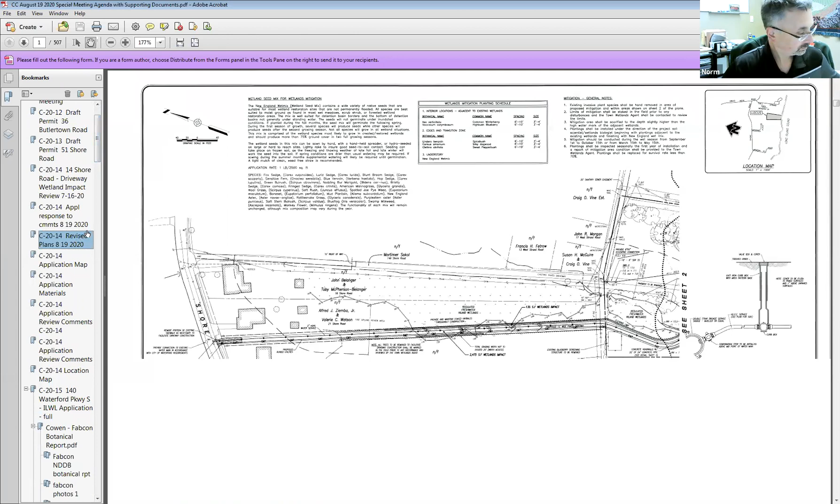Okay, these were the plans that were submitted in response to comments from your staff as well as the fire marshal, and Norm's going to walk us through the changes that were made and the areas of impact. Thanks, Norm, go ahead. All right, thank you.

In response to staff comments, Maureen had a total of 10 comments that she wanted us to address, and I think it's probably best that I just go through them sequentially as they were presented to us.

So number one, the wetland evaluation report indicates there may be a potential 8,000 square foot impact associated with upgrading the existing paved drive. This paved driveway is currently the driveway that Mr. Mortimer has an easement over to access his property. As you know, the proposal before you is to construct a dedicated drive within a 20-foot strip of land that he owns that goes to his property.

One of the questions regarding the existing driveway was about upgrading it because it is rather narrow in some spots. It was originally constructed through wetlands, and there are significant wetlands on either side of it. However, one of the issues Maureen brought up is whether Mr. Mortimer actually had permission to upgrade that driveway, which he didn't. Secondly, there was also a question of whether it was an access easement, but there really is no language in that easement saying he could run utilities up there.

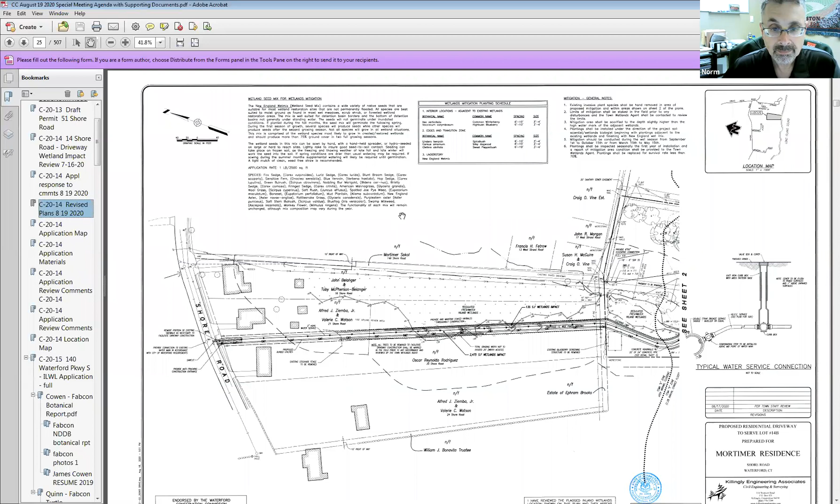Number two, the site plan needs to identify the limits of vegetation clearing. If you go to sheet 2, Maureen - we've actually shown it along the existing driveway, but in this area, along where there's going to be a crossing of an intermittent little water course, it's actually kind of a drainage that comes down through that point. We've shown the limits of clearing with a heavy sort of tree line there.

I don't know if you can see my marker on the screen here, but right next to that note that says 275 square feet of wetlands impact is where the limits of clearing are going to be. That limit is anywhere from 25 to 40 feet from the delineated wetlands in that area. Also in that area, which I'll get to after, we are proposing some mitigation for the impacts we're proposing on this project.

Number three, erosion and sedimentation control measures are required for construction of the southern part of the proposed driveway and the culvert installation. We've noted for the culvert installation - for clarity it was just easier to address it as a note. I've shown staked hay bales on both sides of the driveway adjacent to the wetlands, and I also have a note on the plan to provide crushed stone check dams upstream and downstream of the proposed crossing area during construction to prevent any silt or sediment from transporting down through that area.

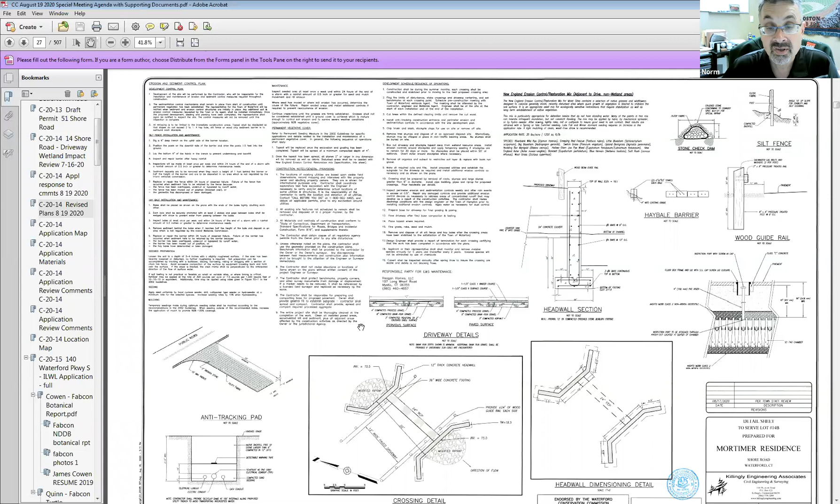At this particular area, we are limiting the disturbance to only 275 square feet. We estimate that it would have been somewhere in the realm of 800 to 900 square feet without the headwalls. So in our opinion, we think it's just a much better solution.

Additional detail is required for the 3,000-foot wetland mitigation area - that's the area Maureen is showing you. If you go back to sheet number 1, this was put on the plans under the recommendations of Ian Cole, the wetlands biologist who couldn't be here this evening.

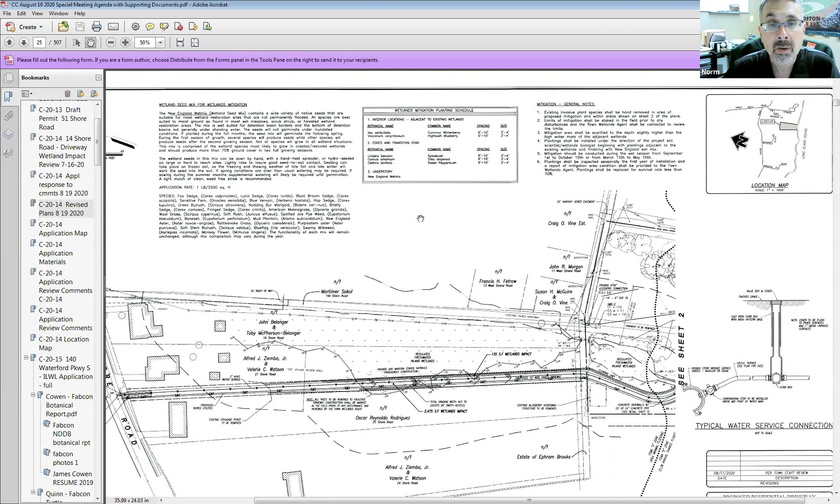For the peripheral areas we're proposing a New England wetland seed mix, and then the mitigation planting schedule for interior locations adjacent to the existing wetlands calls for common winterberry and high bush blueberry. Edges away from there in the transition zone will have spicebush, silky dogwood, and sweet pepper bush, with the understory between these using the New England wet mix. I also have some general notes for the mitigation describing how this would be accomplished.

We are also going to be doing some invasive species mitigation along the edge of the channel near the crossing, on both sides - that's where Maureen is pointing out. There are some things like autumn olive there, a couple of other invasive species, bittersweet, things that are really kind of taking over, so the notes specify that.

That particular activity is going to be by hand methods. We do not recommend or call for the use of machines to take that stuff out of there. I think note number 7 really talks to that same point about the adaptive invasive species management plan - I believe I included it with my last response.

That was comment number 7 by Maureen in her review. Number 8, the wetland flag numbers on the site do not correspond with the plans.

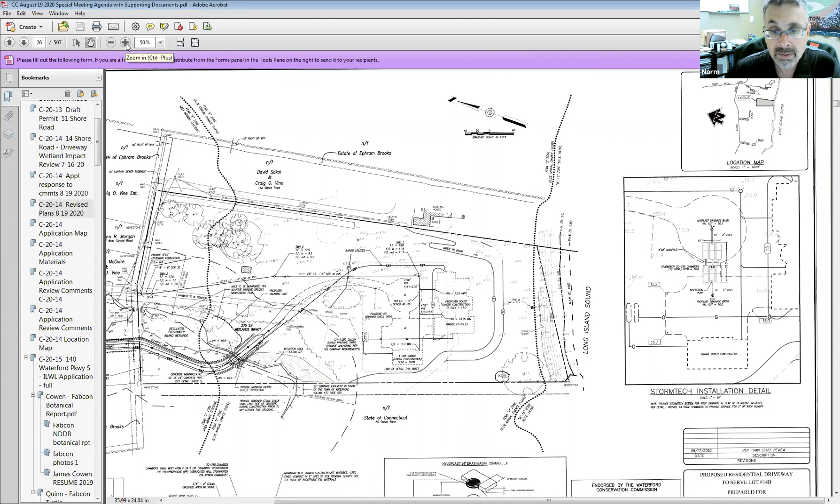What we did in the areas of the crossing - the original wetlands were delineated by Joseph Thoreau, and by the time we got involved here, and I think by the time Maureen went out there, the flags were gone. Even though they had been survey located, they weren't visible in the field. So we had Ian Cole go out there and redelineate in the areas where the crossings would be.

Those don't correspond to the original wetland flags, but Ian was actually able to find some knots from the original flags that he rehung, and he agreed substantially with the previous delineation. In fact, I believe he said that when he went out there, he thought it was pretty much spot on with what he would have delineated.

So what you're seeing on the plans in the areas of the crossings are the flags that we actually survey located. And for the wetland flags away from the crossings, those were wetland flags that we took from the previous survey.

The plan should be stamped and signed by the engineer. I did stamp that plan - I believe these particular plans show that. I had Ian's signature on it too, that you can't see very clearly, but he also did sign the plan as well.

And then finally, I think there were a couple of leftover notes from the basically canned narrative that we use to start the projects off, and I think there were a couple of spots that mentioned another municipality. We've addressed that and made sure that all references within that narrative refer to Waterford.

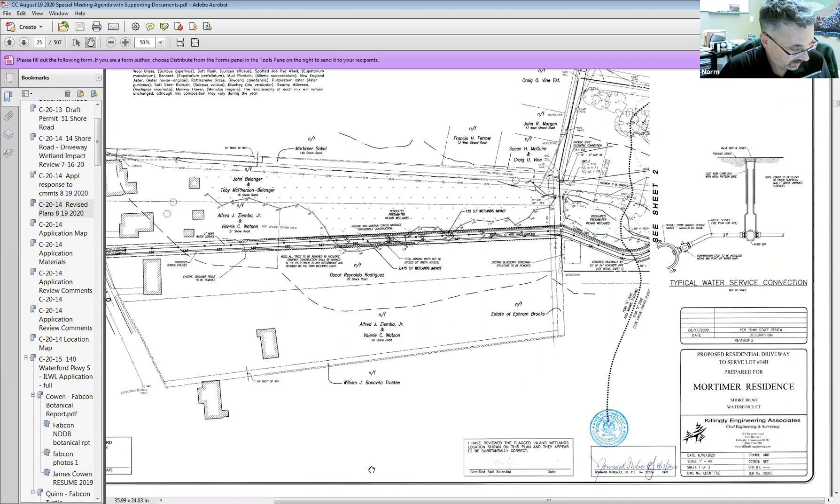There was a comment by the fire marshal regarding the existing driveway not being blocked by bollards. That particular proposal is going away because we were talking about abandoning that existing driveway and making it a pedestrian path, with bollards to alleviate traffic. That proposal has been eliminated, and the fire marshal didn't want the bollards there anyway. He said it would be a good secondary access should there be some sort of emergency where one or the other of these driveways is not accessible.

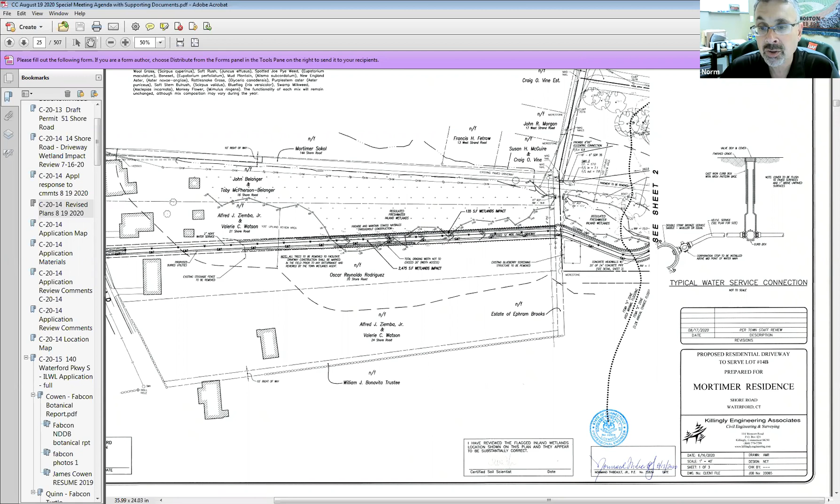And finally, up at the house, we had shown either crushed stone or crushed seashell driveway associated with the house itself. The fire marshal did not want that. That was in that particular area that Maureen is showing. The fire marshal wanted a paved driveway there. And actually, I don't see that note on this particular plan, Maureen. I'm wondering...

If I may, Norm, can you hear me? I believe that comment was associated with that 10-foot wide pathway across the area previously shown right here. That is correct, yes. And his concern was he couldn't turn a truck in such a narrow area. Well, that's gone. That's not happening any longer. I believe that's what the comment was addressing. Okay, I believe that was it.

The last item, I believe Mr. Reagan submitted that to you, as well as I did, regarding the deed for the property and the attorney's research regarding crossing that 10-foot wide easement. Did you receive that, Maureen? Yes, we did. This was a question that just came up, whether or not he has a right to cross it. The deed that was provided, for the benefit of the commission, indicates that from the 1920s and then 1940, when the applicant purchased this property, he also assumed the rights to use that right of way, either by foot or vehicle, I believe it referred to in 1920. I believe so, yes.

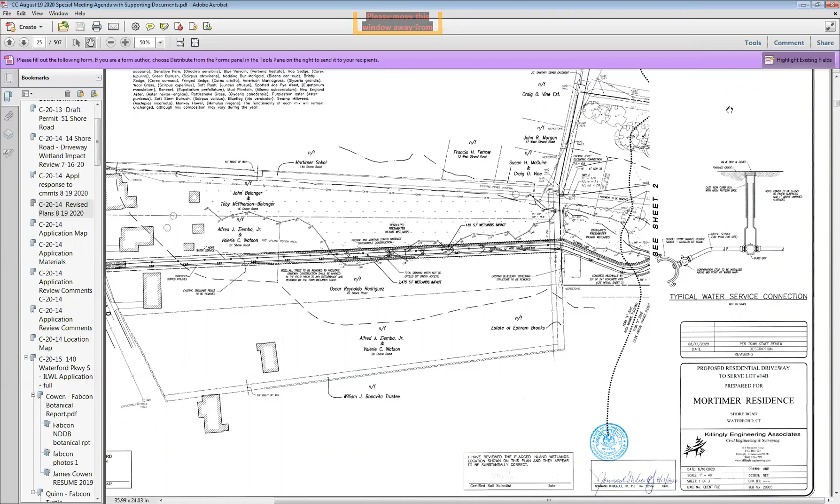Okay, Mr. Chair, I have my hand up, but I'm sorry. No problem. Is now a good time to ask a question? Yes, go ahead. Okay, sure. All right, hello sir, Dave Lersch here.

So I'm traveling down the road here, the driveway toward the house, and I reach a point where we cross the wetland, around wetland markers 10B, 11B, 12B, 13B, which I see actually extends onto the neighbor's property. But with the driveway in place now, it seems that you're now cutting off that part of the wetland that's actually on Oscar Reynaldo Rodriguez's property, 20 Shore Road. Is that right? That is correct.

Is there planned any type of culvert under the road to allow water to flush into that wetland over there, or not? I didn't see it on plans. I'm assuming not. No, there is not. It's very flat, the area - and I think if you look at the photographs that Ian Cole provided in his impact report, you can see that this is an existing path, very, very flat. I walked it, by the way. So there's not a real lot of evidence of actual flow in that area. You just get that little depression in the terrain where the soils demonstrate some hydric properties. So we could certainly evaluate it at the time of construction. I don't think the drive is going to be installed high enough to actually warrant the installation of a pipe, unless we do something small like a little 4-inch PVC or something of that nature.

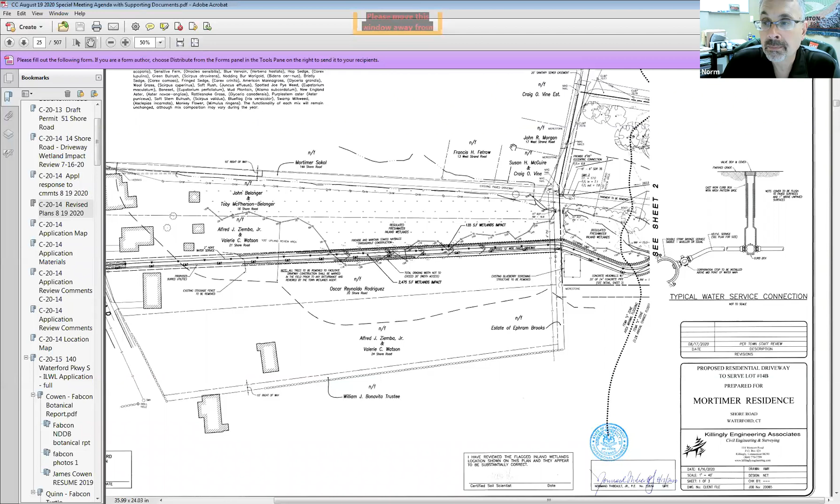Oh, yeah, so I wanted to talk with you about that. So currently there is a pipe that runs under a drain, or that runs under the easement, right? Correct. Yeah, and what size is that currently? I believe it's 15-inch. So is that going to be replaced? No, we're not touching that one. What you're showing on the drawing here is a 15-inch RCP, which stands for reinforced concrete pipe.

Okay, so the 15-inch reinforced concrete pipe, you feel that's adequate, given the amount of reduction of wetlands that you're going to be doing with the driveway, right? Oh, yes, absolutely. So in your professional opinion, you believe you don't have to make it larger or do anything with that, it's fine? No, I don't see the need for it. It's in good shape as far as how long it's been in there. But as far as you know, it's in pretty good shape. Yeah, it's in better shape than the 24-inch one, yes.

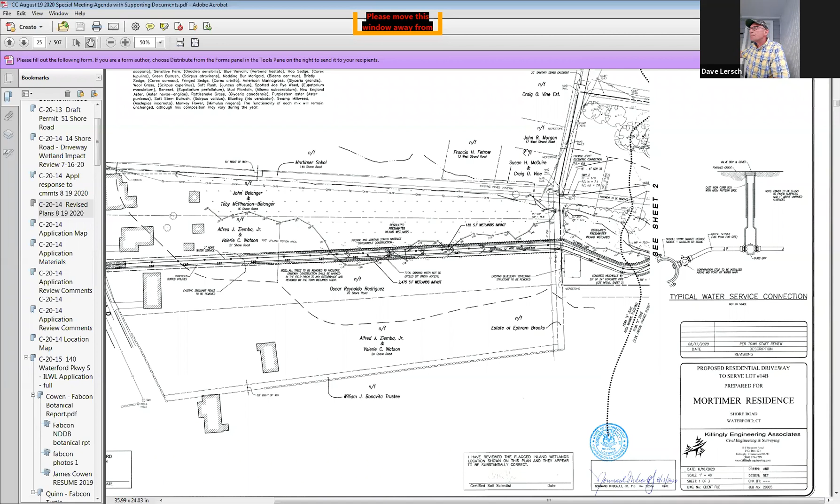Was there some discussion about enhancing some new wetland area, wasn't there? Maybe not. No. Well, there is a wetlands mitigation area. We are adjacent to the wetlands on sheet 2. We're providing 3,000 square feet of mitigation area.

Okay, I'm going to take another look at that, but hey, thanks so much for answering those questions. I might get back to you in a couple minutes, okay? Not a problem. All right, thanks.

Any other questions or comments from the commission?

Norm, I have a question, and you may have answered this already. I'm looking at the report from E&T Cole dated 16 July, and on page 2, there's a statement: the existing easement access would be abandoned in place with controls to prevent continued usage. I think that statement has kind of been overcome by events, has it not?

Yes, it has. That was early on. As we discussed earlier, that was when that existing driveway that the applicant had an easement over, there was discussion about abandoning it, and I think that's kind of a leftover statement from that. Thank you.

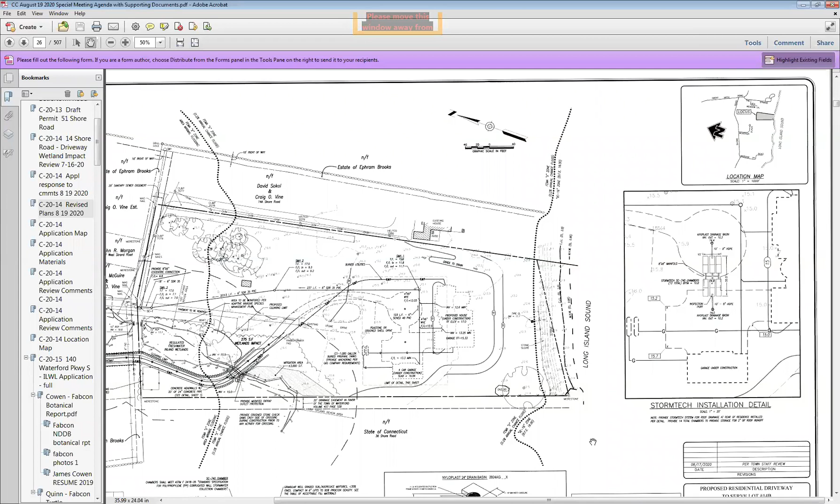Thank you, Norm. Thank you.

Next item on the agenda, C-20-15, 140 Waterford Parkway South. Concrete products manufacturing and outdoor storage. Fabcon Precast, applicant. Marathon Fund I LLC, owner. Loureiro, agent. I hope I pronounced that right.

Yep, Seamus is there. Unmute him. Sorry, can you guys hear me?

All right, good evening, Commission. My name is Seamus Moran. I am a PE in Connecticut, and I do work for Lorero.

I'm impressed that you got that right. Usually we have to correct people. I usually say Lorero like sombrero is our expression, so I'm impressed.

Thank you for hosting us tonight, and hope everyone is well and adjusting to these meetings. If you can't hear me, this is my first virtual meeting. Can't hear me, interrupt me, wave your hands, do whatever, no hard feelings. So I just want to make sure everybody can hear me, and if you can't, let me know.

I am here representing the applicant, Fabcon Precast. I'm joined by Clint Brown, also with Loureiro Engineering, and Jeff Prince, with Dacon Corporation. Our project is located at 140 Waterford Parkway South, directly south of I-95, right next to the Coca-Cola facility. I'm sure you're familiar with it. We're in the IP1 General Industrial Park Zone.

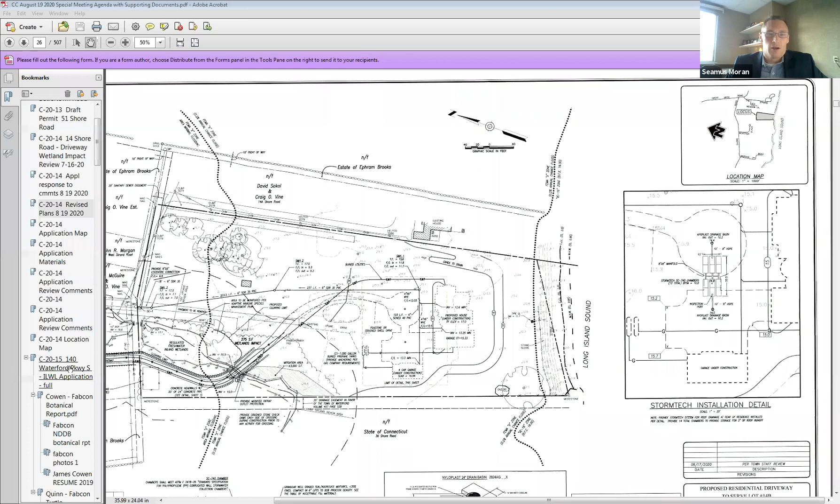So, again, this is 140 Waterford Parkway South. You might be familiar with the site. It used to be the Waterford Airport, operating from 1945 to 1987. After that, a 25-lot commercial subdivision was approved in the early 1990s, and a portion of that infrastructure was installed, including the roadways, stormwater management improvements, some drainage structures, and utilities.

Actually, Maureen, I'm not sure if you have the presentation. Yep, we're loading it. Give us a sec, Seamus. We're going to load up your PowerPoint. Okay, all right, sounds good.

At the top. Do you want me to just toggle it as you go down? So I'm on slide 2, and I can kind of explain how this is formatted so everybody can follow me here. Or page 2 of the PDF, whatever you want to call it.

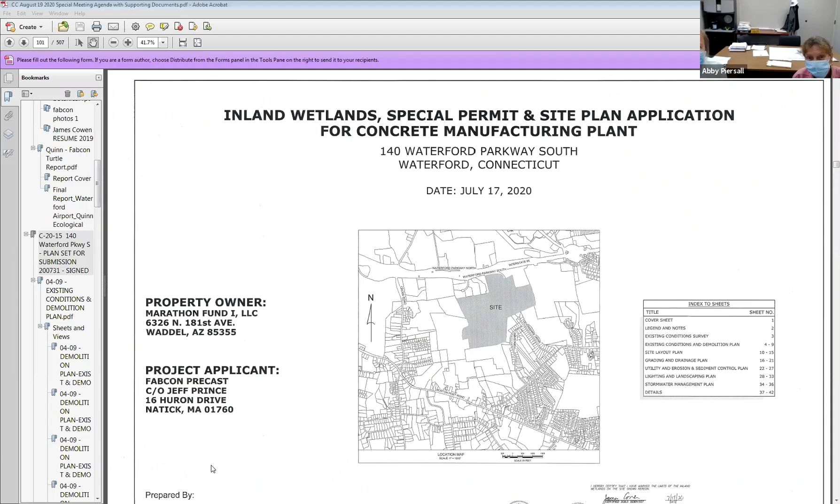Are we good? Are we right? I don't believe so. Slide 2 should be text, almost in a PowerPoint format slide. Is this the plan set? Maybe my screen isn't loading. I'm looking at the cover of the plan set right now. No, hold on. That's what I see, Maureen. Okay, we're working on it. You gotta get rid of that one. Hey, there we go. There we are.

There's currently a few dilapidated buildings remaining from the airport, which went defunct in 1987. And the 25-lot commercial subdivision that was approved in the early 1990s - phase 1 of 7 of that development - was constructed, and part of that included the roadway. So if anybody's been to the site, there's a curb cut, a pretty nice entrance to Waterford Parkway South, and that was constructed as part of that subdivision approval. Next slide, please, Maureen.

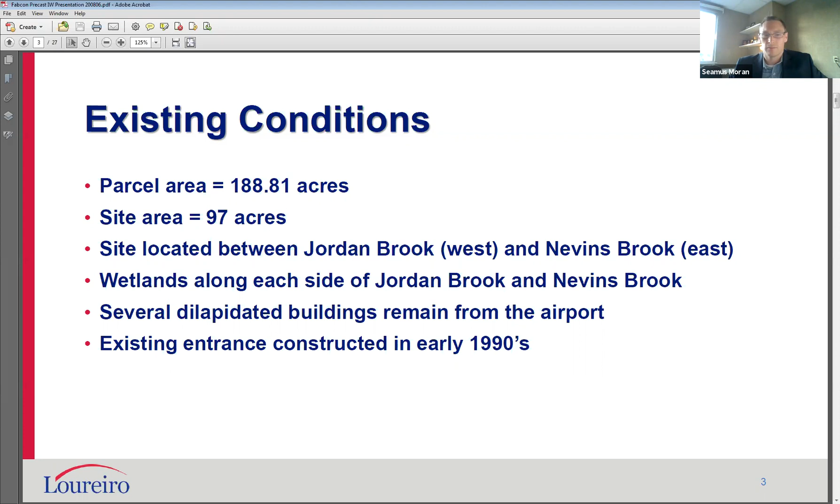Perfect. As well, so that's some of the structures. Utilities - there are several utilities there. There's a 20-inch water transmission main that goes from Waterford Parkway South, bisects through the property southeast, and connects out to the development southeast of our site. There's also a 12-inch water main that taps into that 20-inch transmission main that serves the site currently. There's an 18-inch sanitary sewer main on the west side of development, which is the east side of Jordan Brook. And then there's high voltage electric power that terminates essentially at the northwest corner of the facility, the northwest corner of the site. And then it actually enters the site in 2 locations. It continues east down Waterford Parkway South, just east of the current driveway, and then runs south onto the property. And there's also one that runs from the end of that high voltage line over the Coca-Cola property onto our property, and then runs east over Jordan Brook. And there's also a gas terminal right at the northwest corner of the property on Waterford Parkway South. Next slide, please, Maureen.

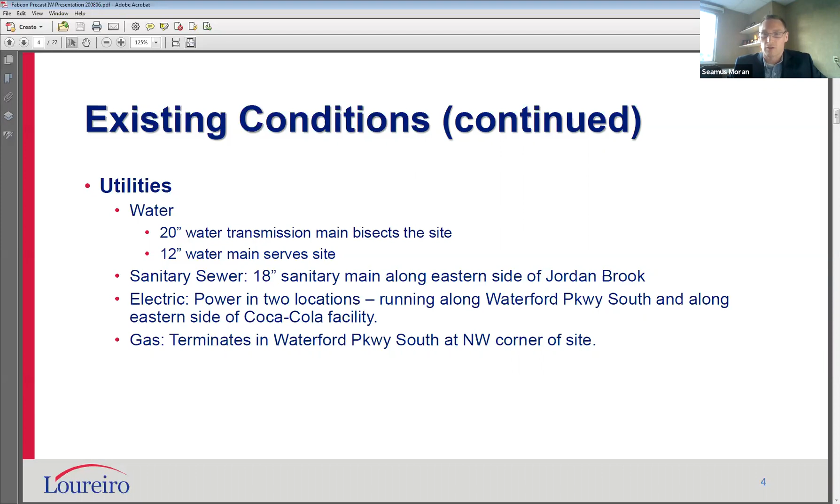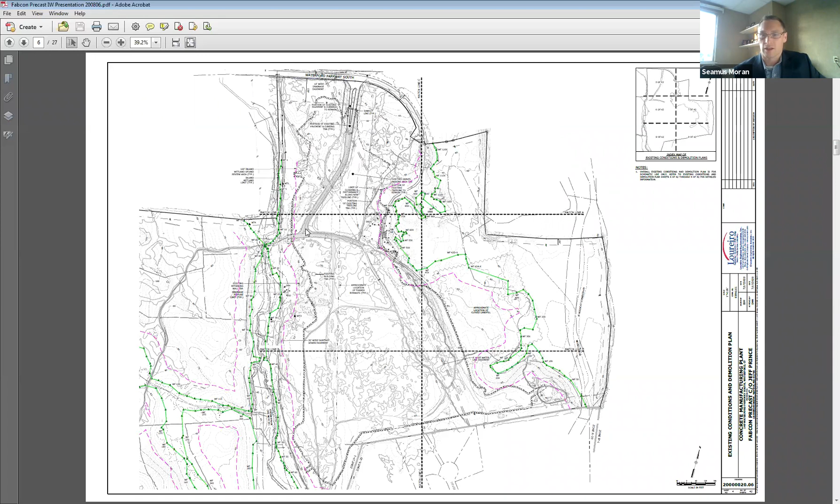So this kind of gives an overall view, and actually we'll focus in - the next slide is at 120 scale, it's an overall. There we go. Perfect, thank you. This shows the eastern half of the development, the existing conditions. You can see the access road that's there, Waterford Parkway South, Jordan Brook, the wetlands associated with Jordan Brook, and Nevins Brook. And I've also highlighted the 100-foot upland review areas in magenta and the edge of the wetlands in green. So it would obviously be very tough to see these lines if they weren't highlighted. Hopefully that helps moving forward throughout the plan set. So I think we're all set - if you want to continue, Maureen, please.

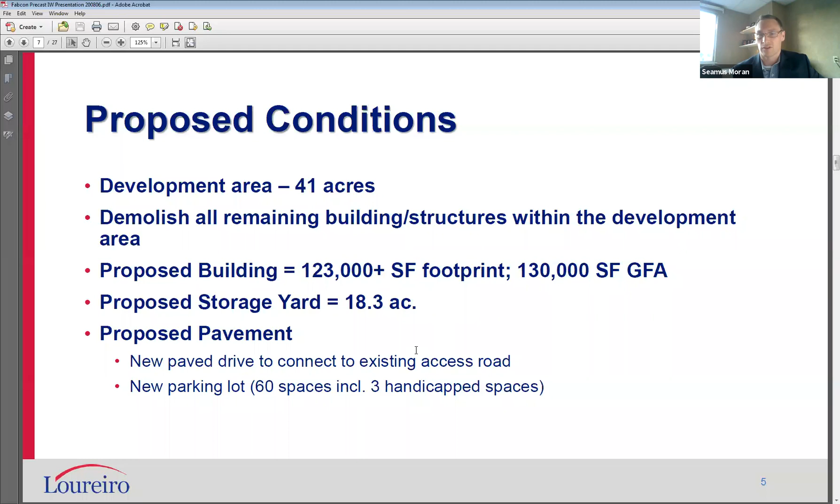All right, now for the fun stuff, proposed conditions. So on our 97-acre half of our development, we're actually proposing to improve approximately 41 acres of that. We're proposing to remove all the old dilapidated buildings within this development area, construct a new 123,000 square foot building - that's the footprint, it's approximately 130,000 square foot gross floor area - and a storage yard that's 18.3 acres to the south of the building. Around the building, we are proposing a paved access road for access to the building, and also a 60-car parking lot, complete with 3 handicap spaces. That's directly adjacent to the office use of the facility. So if you could continue, please, Maureen.

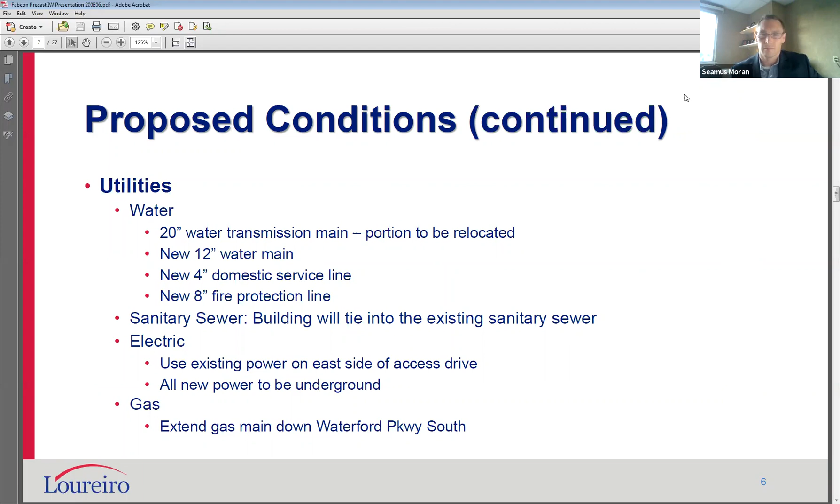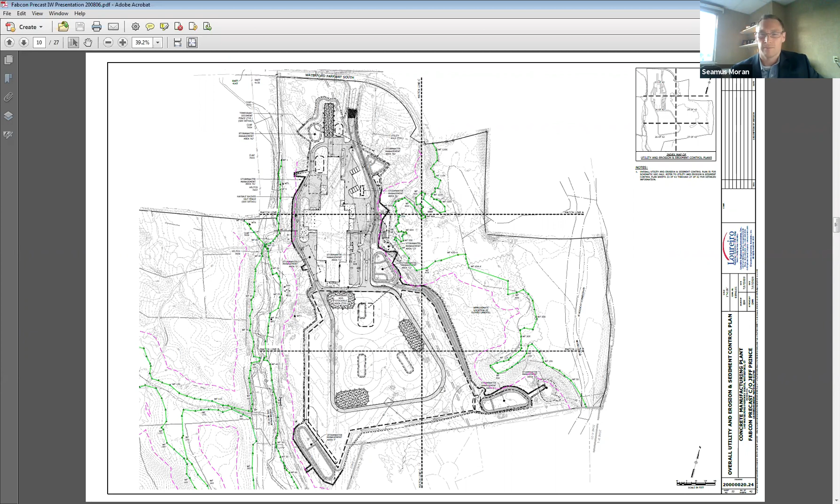Okay, so we're proposing some lighting and landscaping throughout the facility. We're proposing 25-foot poles along the access drives and in the parking areas. We're also proposing some pretty significant landscaping.

Along the southern property line, 40 feet is required where you're abutting an industrial use adjacent to a residential development. We're actually providing a 100-foot landscape buffer along the southern property line where 40 is required, which is a very significant improvement. We're also adding a planting buffer along Waterford Parkway South, and enhancing the riparian buffers along the east side of Jordan Brook and the west side of Nevins Brook. Along the entire western side of the development, we'll put some year-round cover and trees, and along the east side, we're enhancing it in certain specific locations where it's best suited.

Lastly, for landscaping, we're proposing some plantings around all of the basins to create a little microclimate for the basins, keeping any water that sits there from getting too hot. So if you want to continue, please, Maureen.

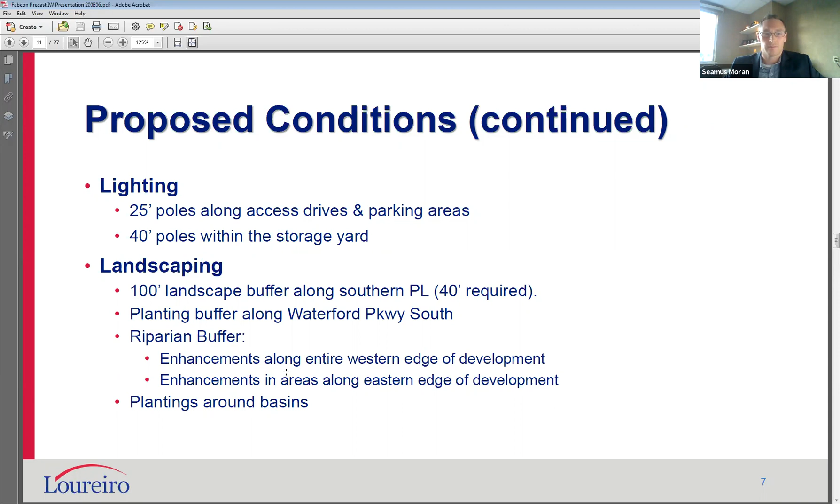If you can go back one. Oh, for Pete's sakes.

Proposed conditions, the last item here is the stormwater management improvements. This is in the Jordan Brook watershed, which is our protected water course in Waterford, so we have some significant stormwater management improvements proposed. We used the Town of Waterford stormwater management standards found in the zoning regulations, along with the Jordan Brook watershed management plan, to develop our design. We also used the 2004 stormwater quality manual and the low impact development appendix to the Connecticut stormwater quality manual. Those are our reference documents and how we formulated our design plan of attack here.

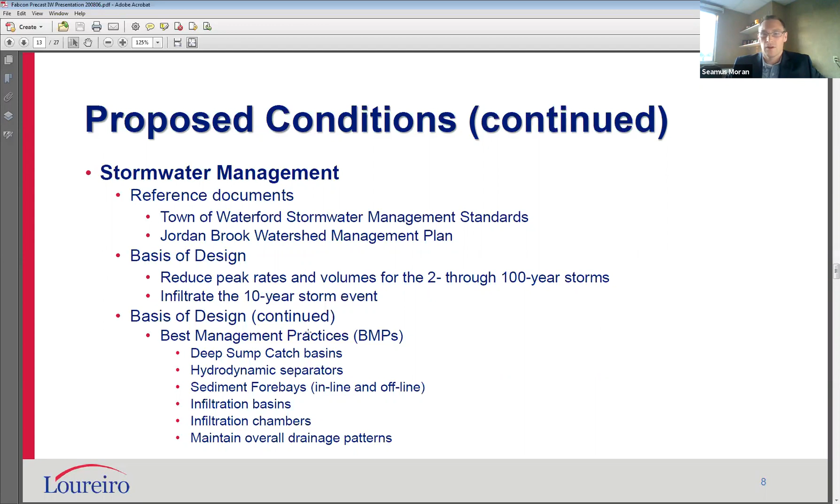So that's kind of a global look at it.

Now, if we go to the next slide, it'll be the upper left-hand corner of the development, showing A1, which is the northwest area of the building where there's a large bed of StormTech units. This is for a portion of the asphalt and the runoff generated from the building. Basin A2 is a small infiltration basin, which just captures some of that runoff from the pavement area north of the building.

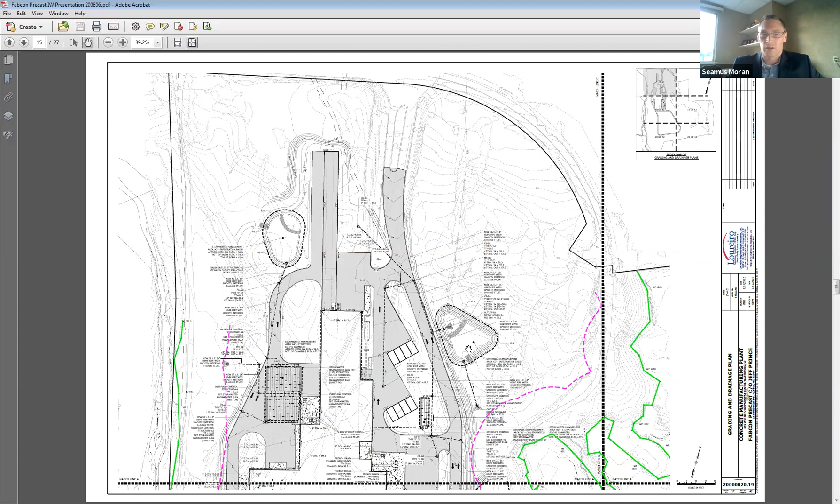So this is directly south of that. The match line north here matches the match line in the south in the last sheet, so you can see this is the building. Southeast of the building, we have C1, another small bed of StormTech units used to infiltrate the roof runoff. C2 is a large basin, which is the overflow from C1 and also the pavement areas.

C2 actually discharges to an existing basin that was constructed as part of the 1990 subdivision approval. We're just discharging to that basin, not for storage reasons, but because there's already a discharge pipe in there, so we can keep the same outlet location.

That's correct, thank you Maureen. So we can keep the same outlet location to the wetlands, so we're not adding a new outfall to the wetlands.

On this sheet, you can also see within the storage yard, on the north side, there is what I'm calling the offline sediment forebay. That's shown on this sheet as well.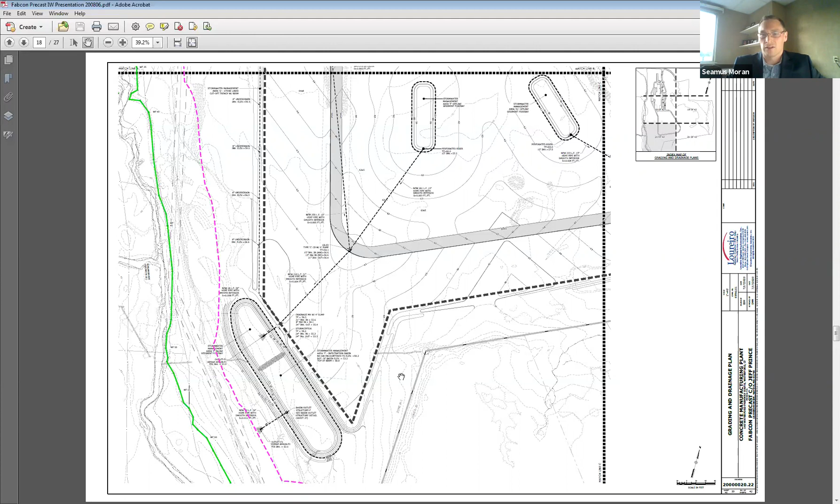This is basin E. Basin E1 is the proposed one you can see, treating the runoff from the southeast portion of the storage yard. We're discharging basin E1 into the existing basin that was constructed in 1990. Again, for the same reasons, there's an outlet discharge pipe from that existing basin adjacent to the wetlands, so we're going to keep that same outfall location. So that's pretty much the stormwater.

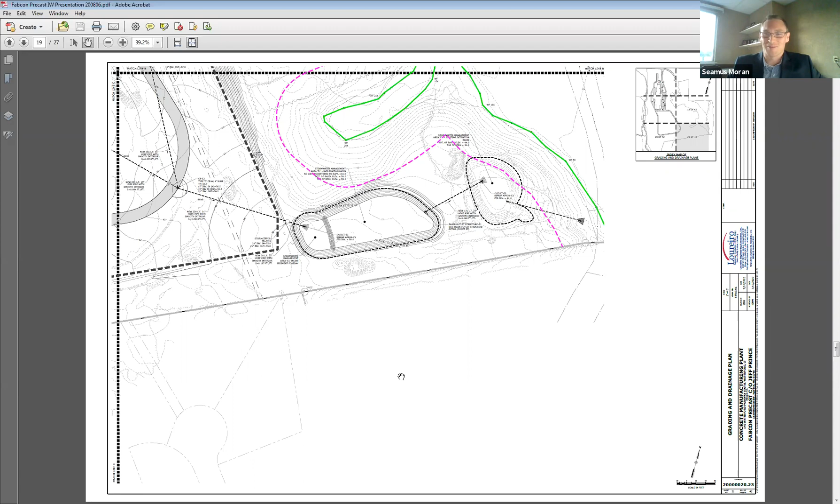I'm sorry, I ran through it fairly quickly. I guess the moral of the story is we're trying to do all we can for the stormwater improvements. So if you want to continue to the next slide, please, Maureen.

So we've had several surveys done. We've had a wetlands functions and values assessment done by Jim Cowan. The summary of his findings was in the report. There's two cryptic vernal pools observed. Vernal pool 1 was east of the development, on the west side of Nevins Brook between wetland flags 45X and 47X. He noted there was no actual use this year, but there's a 7-year period where there could be some growth, so it's with low to marginal productivity.

Vernal pool 2 is west of Jordan Brook, not even on the same side of the brook, between wetland flags 261 to 263. Just two blurbs from his letter: there is no direct wetland impact associated with the proposed development, and most of these indirect impacts have been mitigated by proper design, which includes avoidance of wetlands and uplands immediately adjacent to wetlands. So those are the 2 sentences I figured I'd show you guys rather than the 20-page report.

So if you go to the next, thank you. We had, as I mentioned, some ecological surveys done. Another one was a botanical survey. These all stemmed from a preliminary screening to the NDDB. They came back with a couple species that we should investigate, of both plants and vegetation and animal life.

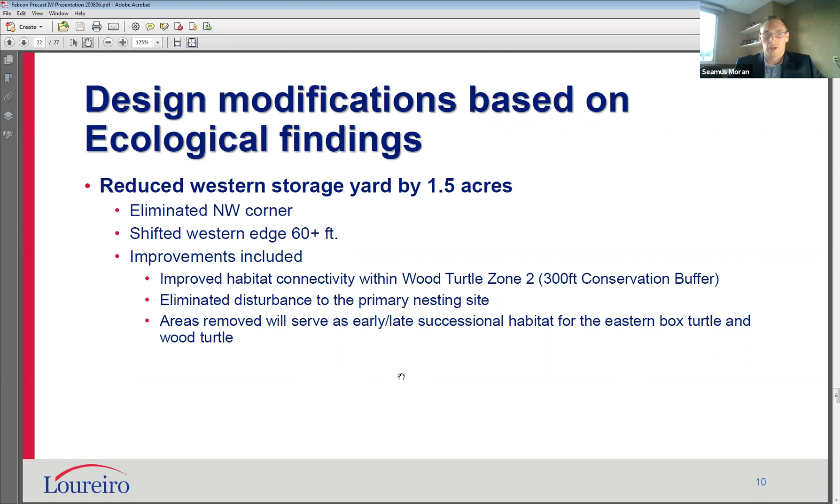We submitted an NDDB application on July 28th, and we did hear back on Monday. The letter essentially said they agree with the findings, that there were no birds of interest and no botanical vegetation of concern, and they agree with the preventative improvements we implemented based on the turtle survey. So we did hear back from them.

So all this is shown on this sheet, which shows in that northwest corner a little section that we cut out of the storage yard that previously went straight up. We cut that off, and that western edge was also moved in 60 feet. Okay, I think that's it for this sheet.

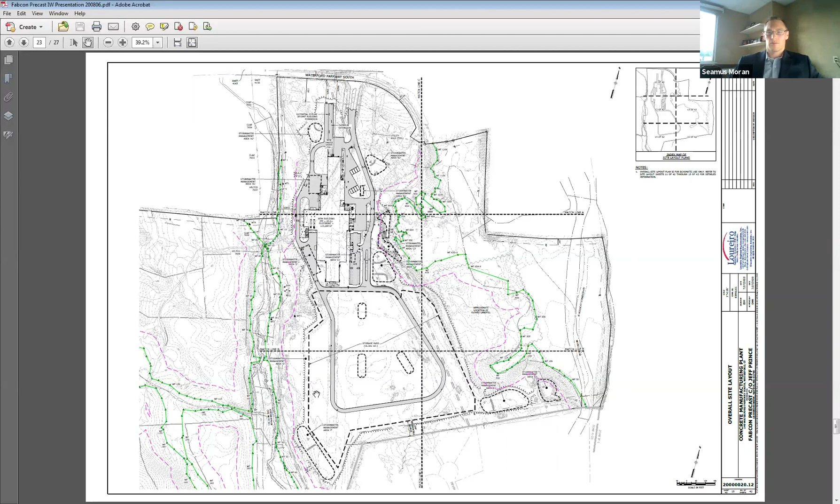We've also worked very closely with Maureen. She's always helpful. One of the comments we received about a month ago was to shift the building so we could provide at least 100 feet between the edge of the wetlands along Jordan Brook and any improvement. So the building is now 125 feet, and the parking is over 100 feet away. So we did shift that.

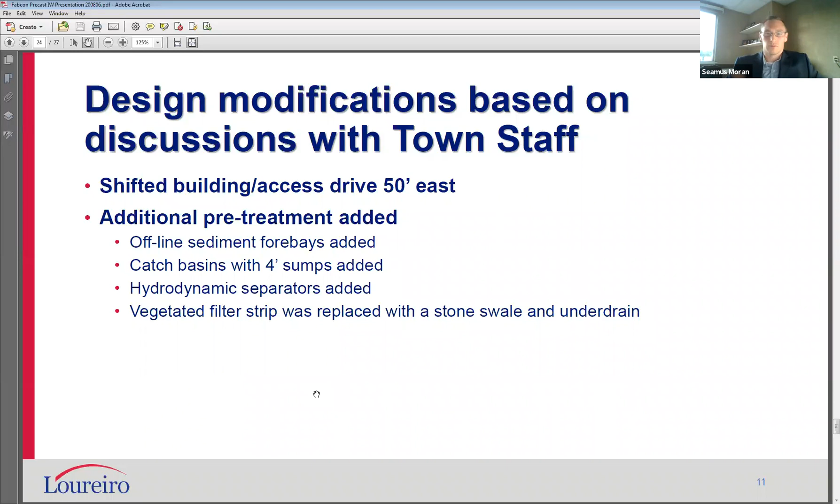We added some catch basins with 4-foot sumps, offline sediment forebays, and hydrodynamic separators. What you see on your vegetated filter strip was previously a vegetated filter strip, and that was replaced with a stone swale and underdrain. So those were all discussions we've had in the last month that changed our plan here.

So that's all the sheet is. If you want to continue moving forward to the next slide, please.

So all of this boils down to our development. These next 2 slides are just a synopsis of our activity within the 100-foot upland review area. Along the Jordan Brook wetlands, we're proposing 0.15 acres of activity within the 100-foot upland review area. The nearest activity, we're proposing some clearing within 73 feet and grading within 80 feet. That's in the location of wetland flag 11.

To the Nevins Brook wetlands, we're proposing approximately 0.23 acres of activity within the 100-foot upland review area. Again, nearest activity is about 40 feet to the clearing, 77 to the grading. And in the southeast corner of the building, there's 34 feet to the clearing and 86 feet to the grading. Last slide, please, Maureen.

Lastly, there's the discharges to the Jordan Brook and Nevins Brook. As I mentioned, we're maintaining 2 of the outfalls that are currently there. The other 4 outfalls are all outside the 100-foot upland review area. So there's some text in there, you can read it if you want to. It's all in the plans, but it's kind of boiled down right here for you.

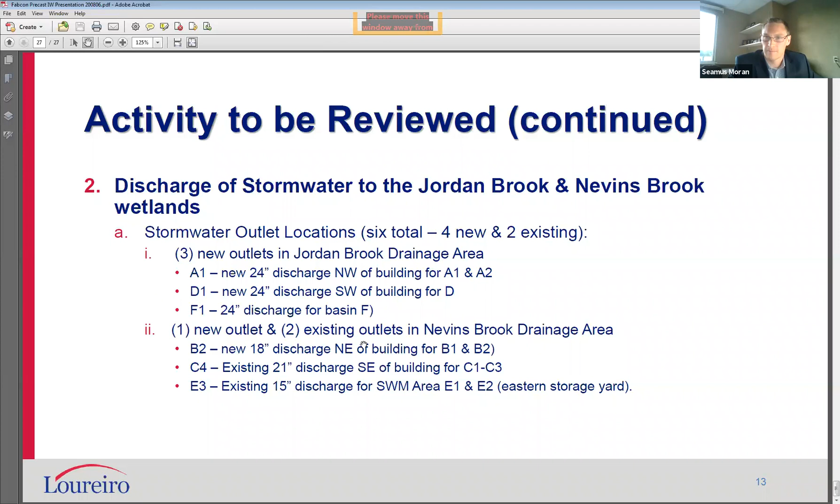So I see we're going to do precast concrete products, right? Correct. So one of the questions I have with this manufacturing type of facility is, what do you expect as far as any type of air emissions, particulates, or whatever might be released from whatever it is that you do? I don't know, maybe there isn't any, but I've got to ask this question because I just want to get a feel for what may end up in the immediate area or down into the brooks.

Of course, and I think Jeff, if you want to jump in here, Jeff and his team have been designing the building, and it's a very sophisticated building, and I think he could probably talk about that a little bit more. Great, thanks.

The largest air emissions will be by heating equipment and fuel, but there won't be any air emissions of dust or concrete products. We may, in fact, be able to have an exemption with the air quality permitting for this particular site if it wasn't for the use of an emergency generator. We believe we will probably be exempt from running those calculations now. So we don't expect there to be any emissions from the building of any concern related to dust, odor, noxious fumes, or any of that, but there will obviously be significant fuel consumption.

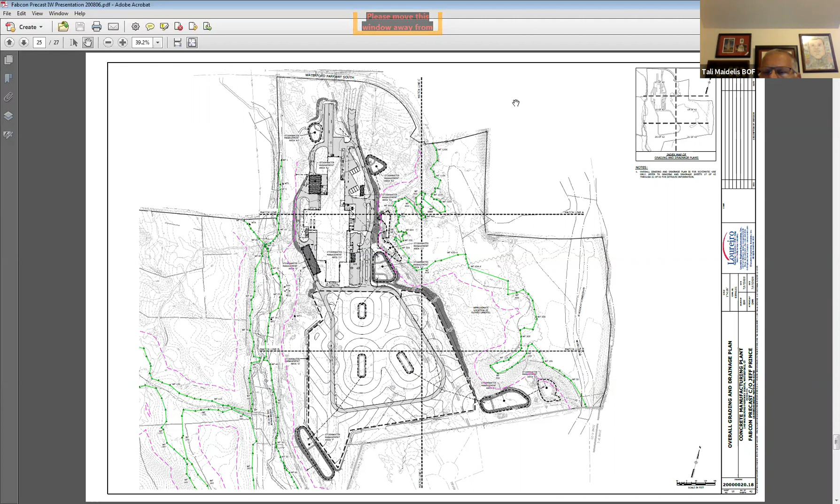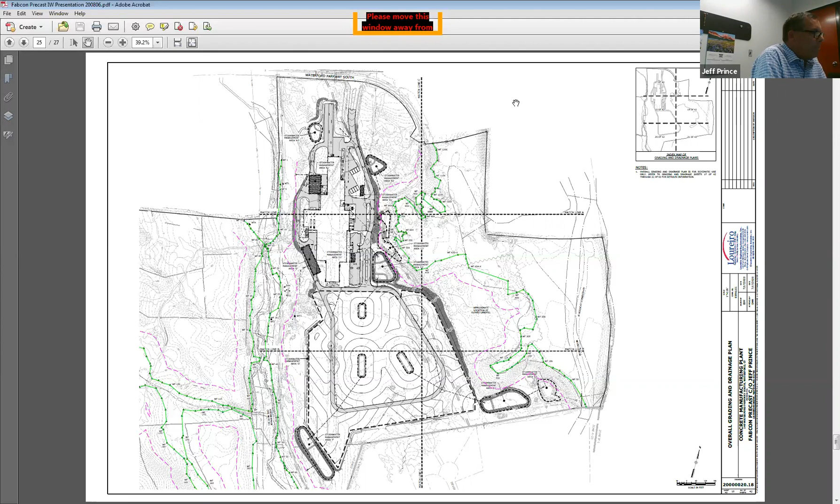I have a question. Any chemicals used in your process for what you're making? Yes, there are chemicals used in the process because there are concrete additives and other materials which are cured before the product is even brought outdoors. So the cured product does not release any chemicals to the yard or to the environment.